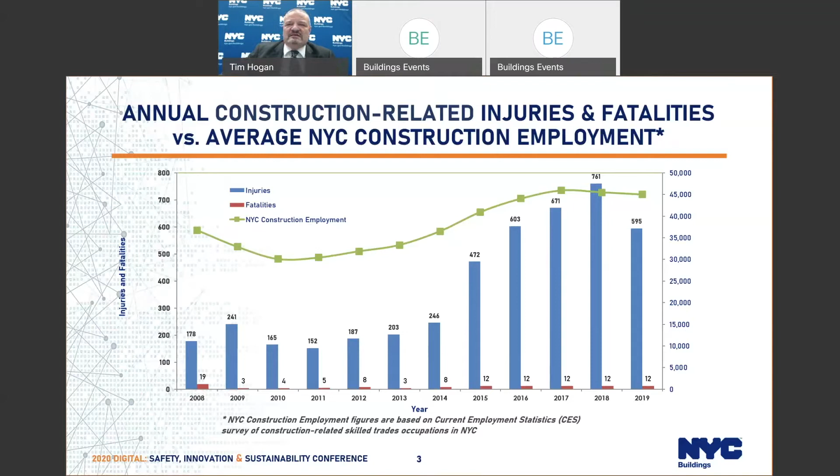This bar chart further illustrates how we reduced the number of incidents by dropping below the last 3 years' levels. So as you can see, we're back to the 2015 level.

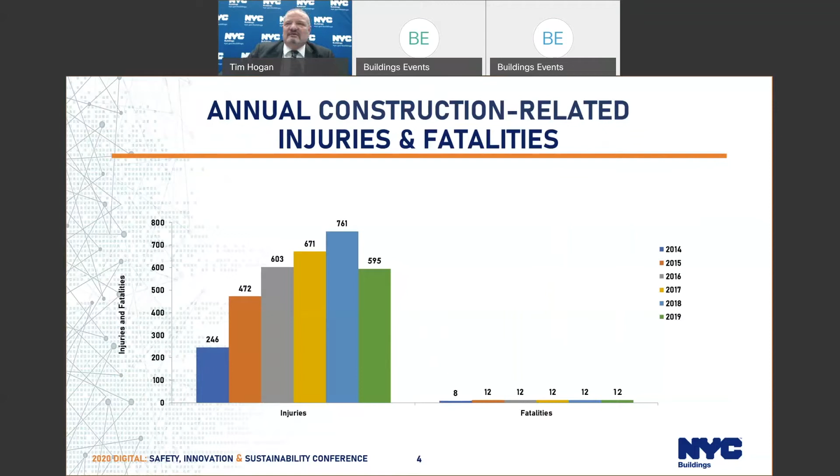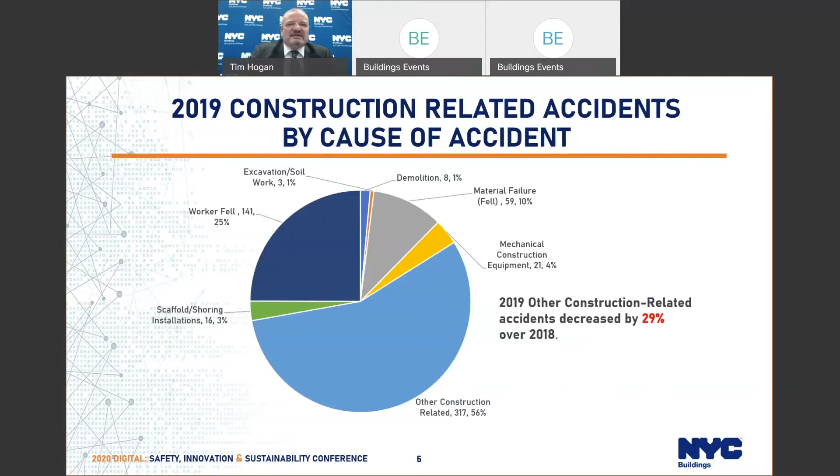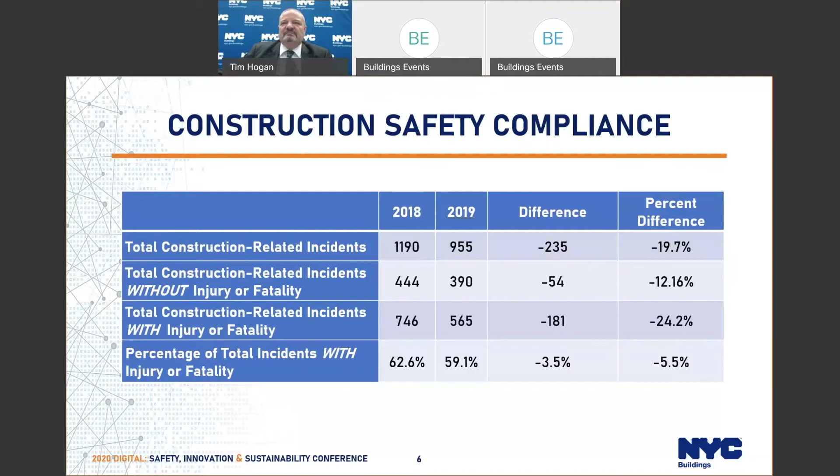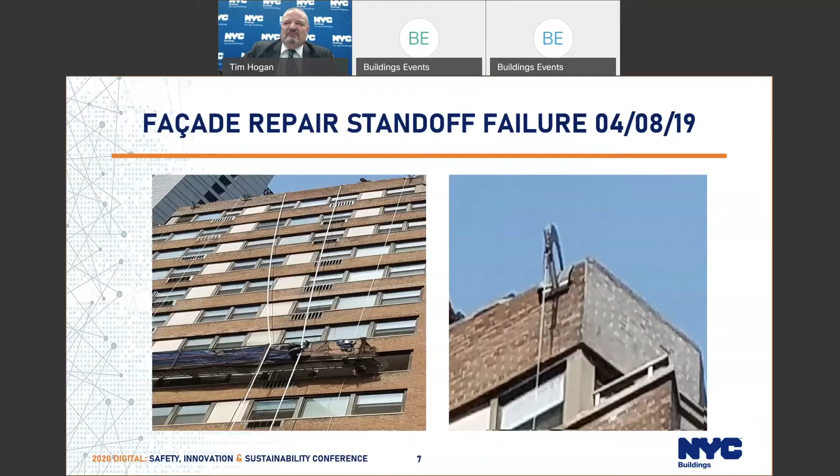So let's start off with our first fatality of the year for 2019. This was located at 311 East 50th Street, Manhattan. On April 8th, a crew was doing facade repairs from a suspended scaffold, and they had placed that suspended scaffold C-hook on a standoff bracket, as you can see in the right-hand picture. While lowering the scaffold, the bracket slipped, causing the C-hook to move forward, and that C-hook impacted the coping stone at the top of the parapet wall. The impact pushed that stone off the top of the wall, and the stone fell and hit the worker on the head, who was on the scaffold, killing him instantly. Failing to protect the coping stone and improper use of the standoff bracket both led to this death.

Although harnesses were on site, the workers did not put them on, nor did they tie off. Failure to tie off led to this death. Lack of guardrails, failure to tie off, and working in high wind conditions were all contributing factors.

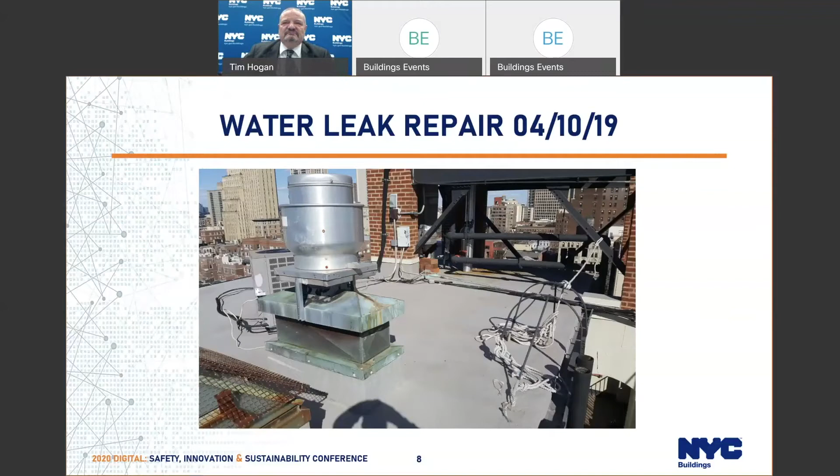A few days later, on April 13th, at 373 Broome Street in Manhattan, a team of workers were assembling a mobile crane to hoist mechanical equipment up to the roof. The assist crane was lifting counterweights into place. After placing one of the counterweights on the back of the crane, using 2 of the 3 ropes attached to the hook, the crane operator lifted the ropes away from the weight. The worker held the 2 ropes that had been attached to the weight aside so they would not contact the weight. However, the 3rd rope caught the lifting lug and pulled the weight up in the air.

The worker tried to run and jump off the crane deck, but the weight flipped over, struck the deck, and landed on top of the worker on the ground. He died from his injuries. Not taking the time to remove excess ropes that were not needed for the pick was a major contributing factor to this incident.

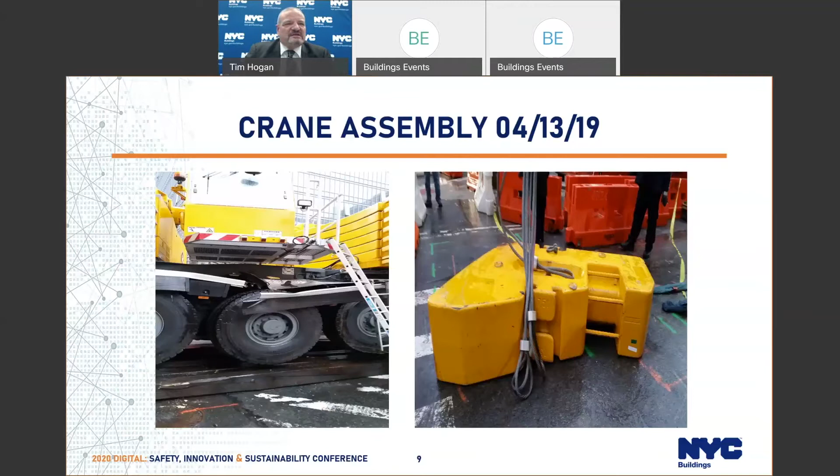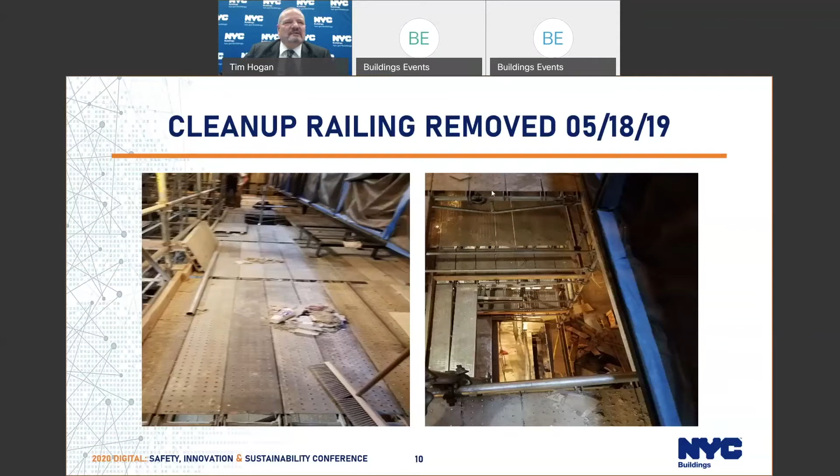On June 22nd, a worker doing facade work at 880 St. Nicholas Avenue in Manhattan was part of a group taking a lunch break. One of the workers went back up the scaffold to retrieve an item, and when he went to retrieve it, he fell to his death. This scaffold exceeded 50 feet, was not permitted, and was improperly installed, lacking decking boards and guardrails. Lack of proper installation of the scaffold and failure to put in the proper safety measures were the key contributing factors to this death.

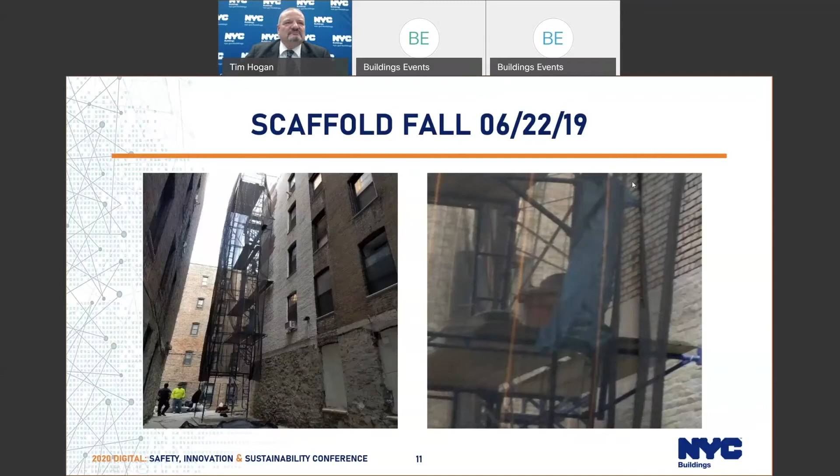On July 30th, a worker was installing a pre-assembled wall section at 6804 Tides Road in Rockaway using a mobile crane. They were placing a wall section between 2 previously installed wall sections. The assembly on the crane bumped into one of the installed sections, and it broke loose from its hold-down brackets, falling over and crushing the worker who was guiding the new wall into place. Lack of proper communications, failure to sequence, and failure to shore and brace the walls already in place were all contributing factors to this fatality.

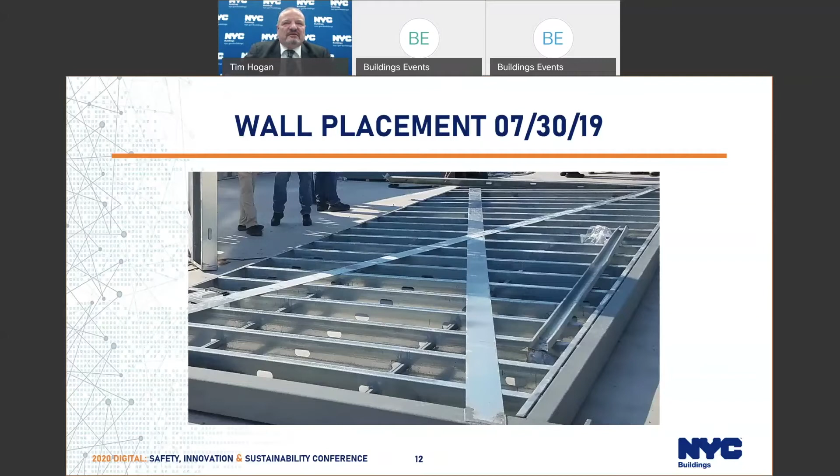Yet another fatality involving cold form steel. On August 27th, workers were building a 4-story structure at 94 East 208th Street in the Bronx. After placing the Q deck on the 3rd floor deck, the contractor accepted delivery of masonry materials onto the deck to continue construction. A week earlier, a special inspector had warned the contractor in writing that he needed to pour the 1st and 2nd floor decks before continuing, to support the loads and provide structural rigidity to the floor and surrounding walls. Shortly after the materials were delivered to the 3rd floor deck, the deck collapsed, killing 1 worker and injuring 5 others.

Failure to brace the deck, lack of oversight by the construction superintendent, failure to follow the special inspector's instructions, lack of knowledge surrounding the requirements of cold form steel, and lack of bracing of the cold form steel were all major contributing factors to this fatality.

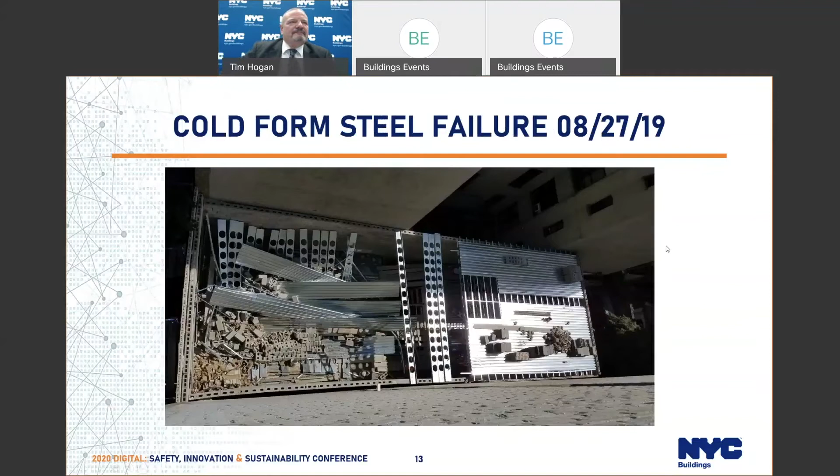On 8/30/2019, workers were assembling a sidewalk shed at 3449 107th Street in Queens. A worker was standing on the back of a flatbed truck, passing materials up to workers erecting the shed. After finishing, the decedent placed his foot on a cross member of the shed and his other foot on the flatbed of the truck, appearing to attempt to climb onto the shed. Losing his balance, he grabbed the junior beam on top of the shed, which was yet unsecured to the shed frame. The I-beam slid back, hitting him in the face and causing him to fall between the shed and the truck. The I-beam followed him to the ground into the gap, and he succumbed to his injuries. Failing to properly gain access to the shed was a key factor.

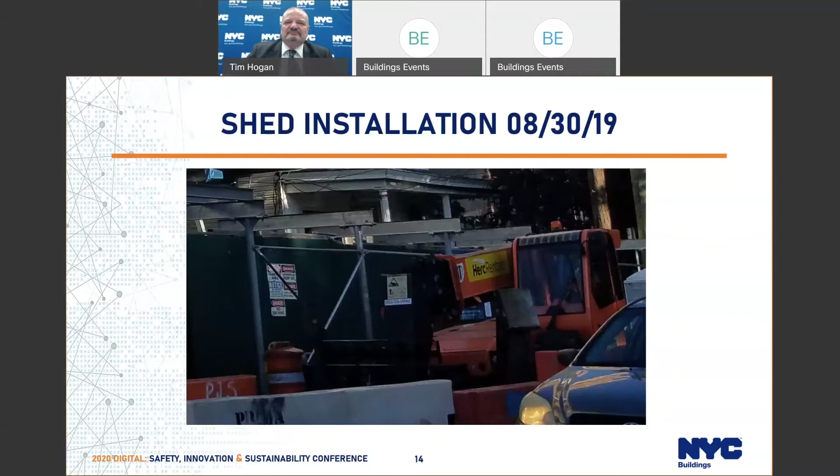On October 21, workers were doing asbestos abatement cleanup at 60 Norfolk Street in Manhattan. This site was the scene of a fire more than a year earlier, and plans were to keep the facade as part of the national historic significance of it.

They planned to remove the asbestos and other debris from the site so they could begin construction. Two workers were standing beneath the archway, holding a hose to keep the dust down from the debris piles. Workers inside the church were using an excavator with crawler treads and a grappling hook, as well as a bobcat to remove the debris. The vibrations from the machinery caused the existing piece of facade to collapse in on top of the two workers working the hose, trapping one and fatally striking the other.

Failure to shore and brace the existing facade and improper use of equipment led to the collapse. The building was known to have issues with stability, and the fact that they brought in mechanical equipment that would cause significant vibration was definitely a serious factor in this incident.

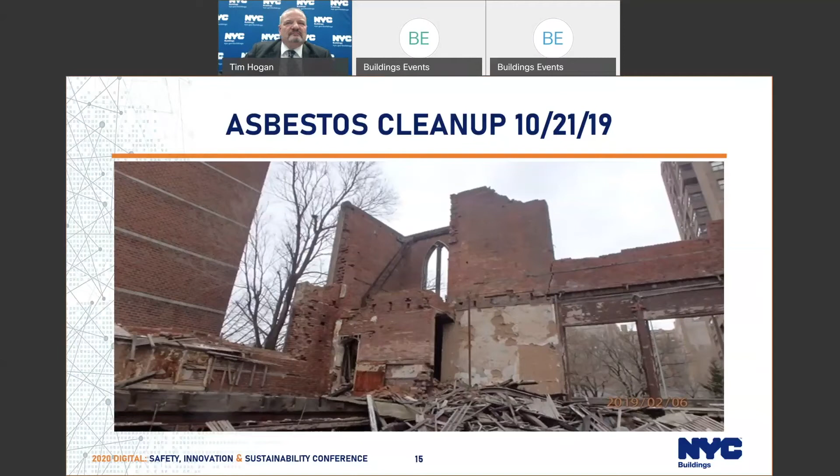On October 24th, workers were going up to the roof of a new 38-story hotel at 1227 Broadway in Manhattan to perform lobby fireproofing on the 35th floor. Rather than waiting for the construction hoist, the workers were able to take control of a temporary elevator platform that was awaiting the cab installation.

They began manually raising the platform, and as they neared the 32nd floor, one of the workers was using his cell phone. He dropped it, and it landed on the top edge of the door frame below. You can see in the right-hand picture, about in the middle, the cell phone.

The worker lied down on the deck to try and retrieve his phone. As he reached down, he placed his head between the platform and the entry to the doors. His head contacted the 33rd floor deck, crushing his skull. He died instantly. Failure to secure the temporary elevator platform by the elevator company and allowing an untrained worker to use the controls to move that platform were both contributing factors to this fatality.

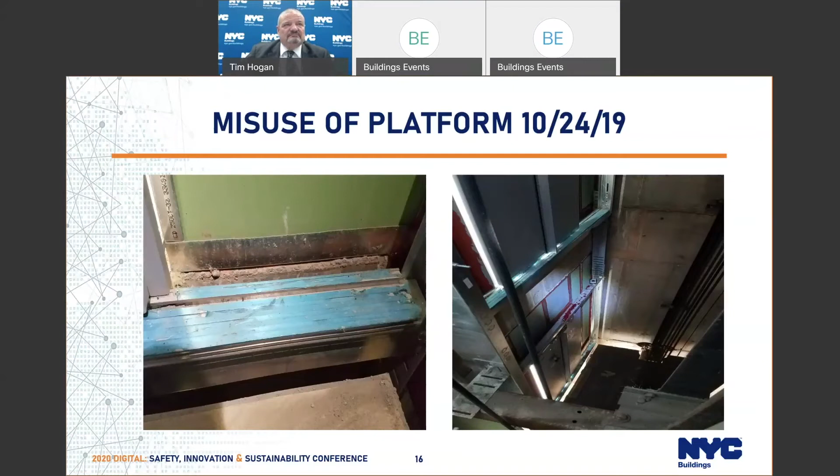On November 11th, a newly hired worker was assigned to move a stack of plywood from the second floor deck of a residential project at 3420 Bedford Avenue in Brooklyn. The plywood was piled on top of a shaftway, and they were getting ready to start working on that shaftway.

They told the worker to remove the pieces of plywood off the area so they could begin construction. He was not made aware that the bottom panel of the plywood covered a yet-to-be-constructed stairwell and that it was unsecured to the deck. They did not have a controlled access zone around the plywood stack, nor any warning signs of the stairwell opening.

The worker lifted the plywood and moved it all to another area. When he lifted the last piece, he walked forward and stepped into the unmarked stairway and fell 3 stories to the basement floor, where he died of massive trauma.

Failure to secure the opening, lack of pre-task training, lack of planning, and failure to set up a controlled access zone were all contributing factors to this death.

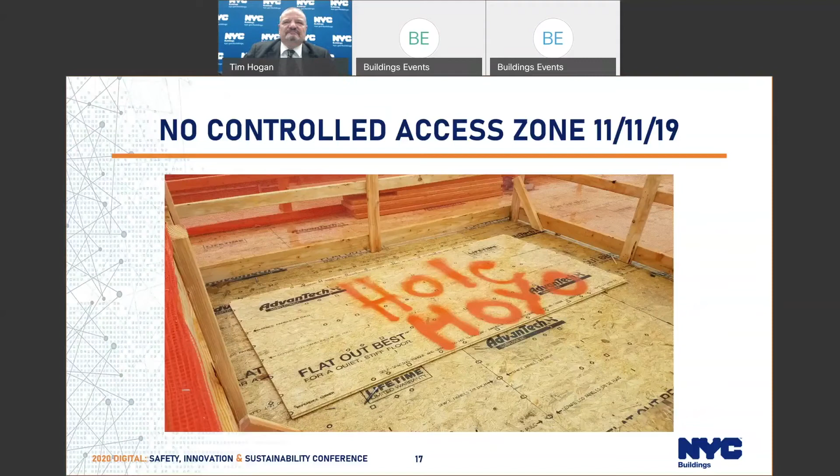On December 20, 2019, a worker was assisting another worker building a scaffold at 20 Bruckner Boulevard in the Bronx. When the worker on the scaffold asked for another plank, and even though there were other planks available nearby, the decedent entered a controlled access zone, which you'll see on the left-hand side of this photograph.

As he went over to pick up the decking on that left-hand side of the photo, he fell into the hole and fell 20 feet below. He was hospitalized and died 2 weeks later of his injuries. Allowing access to the controlled access zone without proper tie-off and equipment was a key factor.

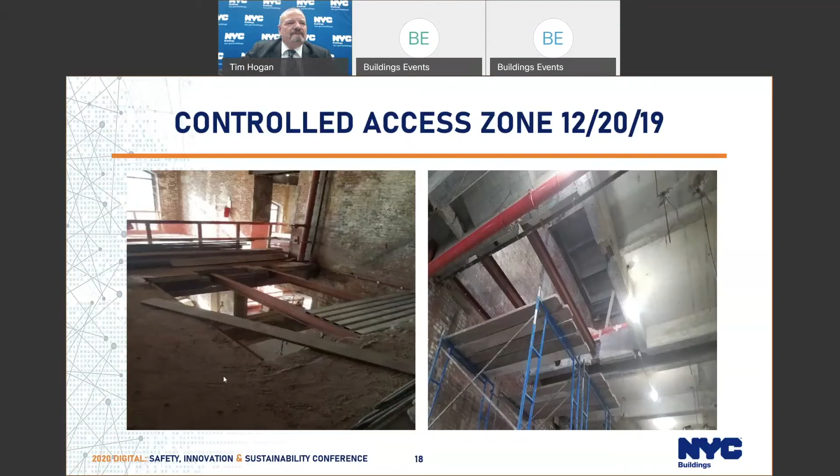So that is the end of our fatalities for 2019, I'm sorry.

I'd like to go on for just some examples of near misses that we had where both safety operations had been put in place, in some instances and in some not, but where we had the chance of more fatalities.

On February 16, a steel worker was installing a beam on the 3rd floor deck at 556 Bergen Avenue in the Bronx. He slipped off the beam and fell, but as he fell, his harness arrested the fall. He sustained some non-life-threatening injuries as he hit the beam below during the fall.

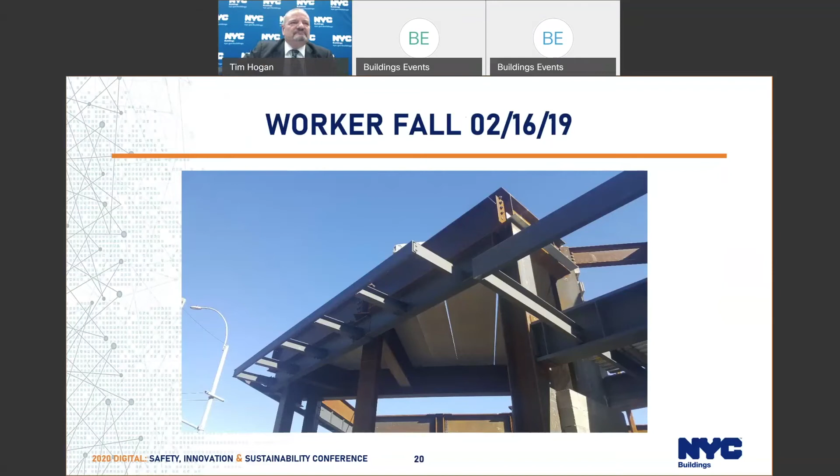On April 16th, at a high-profile project located at 200 Amsterdam Avenue in Manhattan, workers were stripping materials in the vicinity of the 26th floor. One of the workers lost control of the formwork and it fell out of the Doka system through a net below the Doka system, landing in the middle of West 69th Street.

The 8-foot piece of formwork is visible in the right-hand photograph after it was retrieved and put into the back of the truck. There were no injuries. Failure to maintain control of the formwork and improper netting led to the incident.

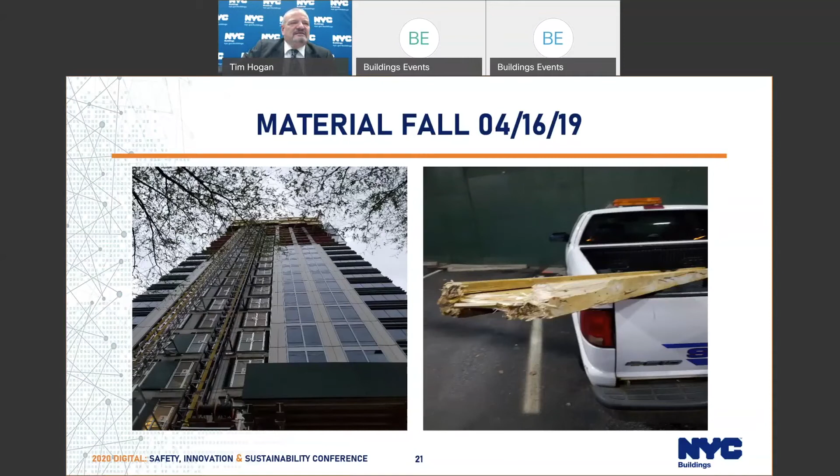On June 11, DOB responded to another standoff bracket failure at 42 West 39th Street in Manhattan. Workers were moving the suspended scaffolds over a terrace projection, which angled the rig, and they were using a standoff bracket. Because of the strain on the C-hook, the standoff bracket slipped, impacted the coping stone, and caused it to rain down into the middle of West 39th Street, seen here on the right-hand photo. The inset photo on the left shows the height of the building, and the main photo on the left shows the twisted standoff bracket and C-hook.

Due to these incidents with standoff brackets, we met with the Special Riggers Association and prohibited their use pending further study. Failing to protect the coping stone from impact was again a leading factor, as it was in a previous fatality, as well as not checking the supporting scaffold for loads imposed and misuse of the suspended scaffold. One of the two workers was hit by the coping stone as it came down, but it just glanced his shoulder. He had injuries that had to be treated, but they were not considered extremely serious.

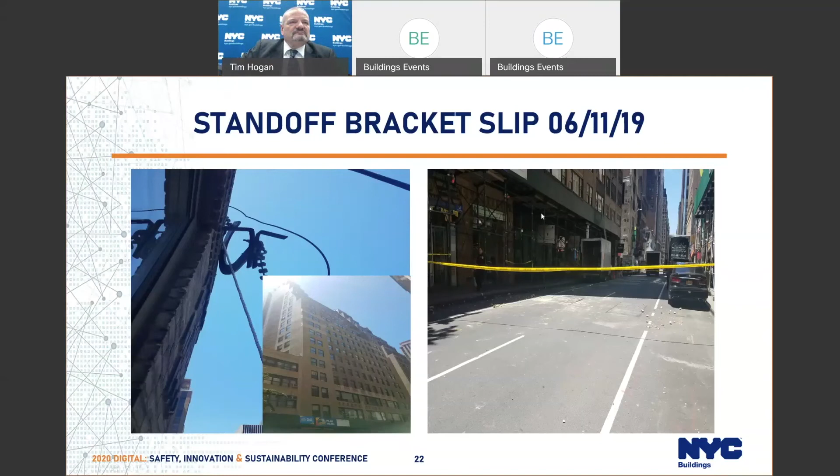On June 30th, the scaffold located at 243 4th Avenue, Brooklyn, was experiencing a high wind event. It was the subject of a warning from DOB the previous day that high winds were expected in the area. Suddenly, the scaffold was blown off the bulkhead and rained down into an outdoor cafe located next door to the construction site. Sitting in the cafe were several people.

One of them, a woman, was struck in the head by one of the planks. She sustained extremely serious injuries but has survived. Investigation revealed that the ties used to stabilize the scaffold had been removed, and that the contractor was awaiting a subcontractor who had been notified two weeks earlier to dismantle the scaffold. Failure to safeguard this site was a major factor in this incident.

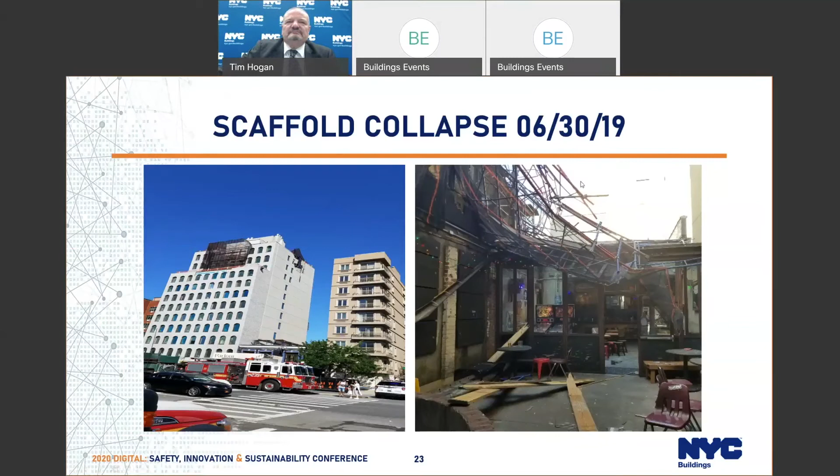On July 17th, a roof worker was replacing roofing material at the residence at 138-24 233rd Street in Queens, including underlying plywood sheathing. The worker, working close to the edge of the roof, failed to tie off and slipped from the roof 2.5 stories. His failure to tie off led to this incident.

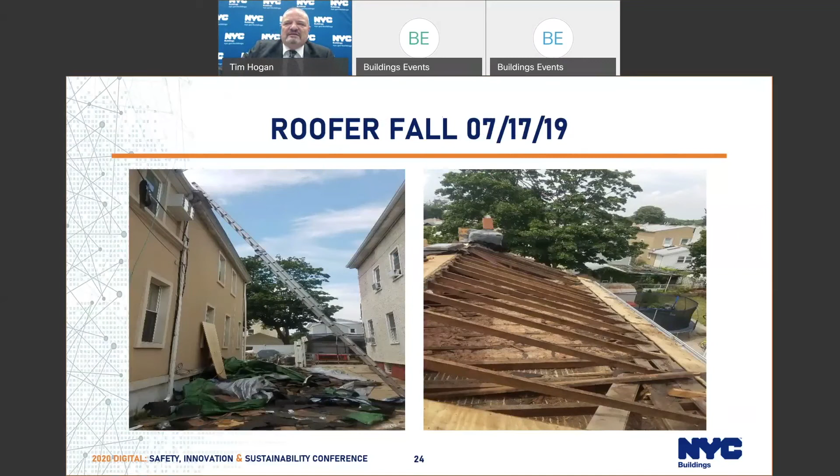On July 30, a worker was using a crane to place roofing materials and steel dunnage onto the roof of 749 FDR Drive in Manhattan, a NYCHA building. During the pick, the crane operator bypassed the safety features of the crane, which was alerting him that he had overloaded it, and he lost control of the load and dropped the steel down onto the street and onto the FDR Drive service road. The crane boom was bent close to 90 degrees, as depicted in the left-hand photograph.

It required closure of the FDR Drive and additional cranes to dismantle the damaged unit. Investigation revealed that the operator overloaded the crane and exceeded the pick radius. He also used slings that were not rated for the lift of the load, causing them to break, as seen in the right-hand photo. There were a few minor injuries. Improper planning, failure to use certified slings, bypassing machine safeties, failure to obtain the weight of the load, and using a crane not rated for the pick as designed were all key factors in this incident.